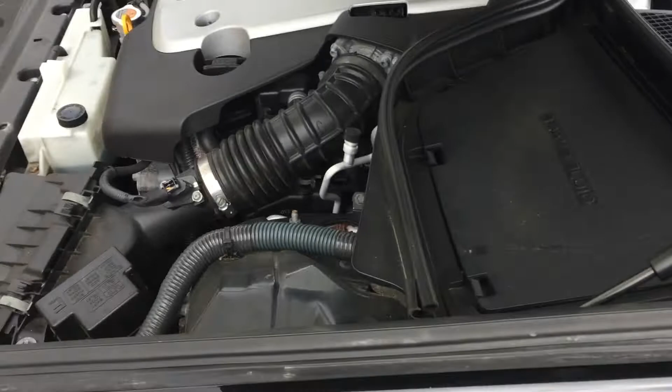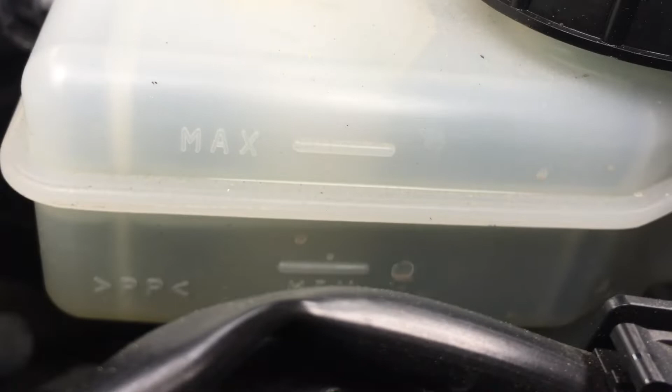So pop open the hood. It's already open actually, but right here on the driver's side, we have the brake fluid reservoir. Pop it open and check your brake fluid level. Let's see what we got here. If you can see that, I'm actually kind of low. Here's max, here's low. I am somewhere in between there.

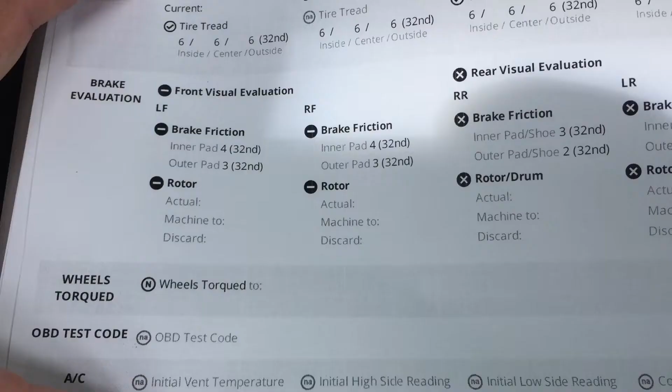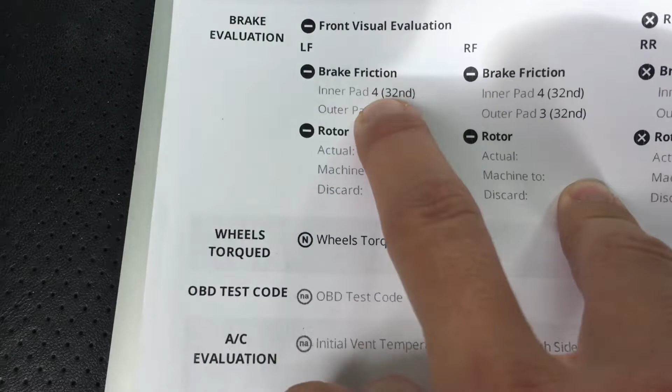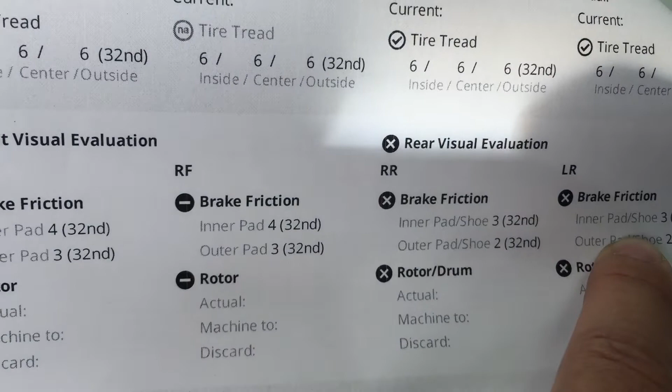Now here's a quick thing. Before you go and start dumping DOT 3 brake fluid into here, there's a reason your brake fluid reservoir is low. That is something worth checking out. In my case, I know what's causing it, so let me show you. So here we have a brake evaluation and vehicle inspection. Check it out. Front brakes, 4.3, 4.3, maybe okay. But here's the thing, check out the rear pads. 2/32nds, 2/32nds, 3/32nds, 3/32nds. The problem why my brake fluid level is low is because I need to replace my pads. My pads have been worn out.

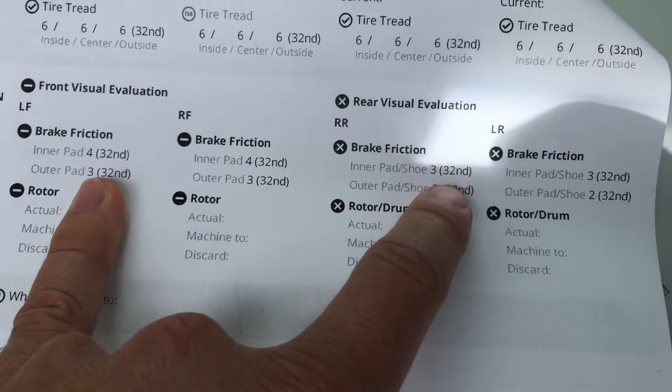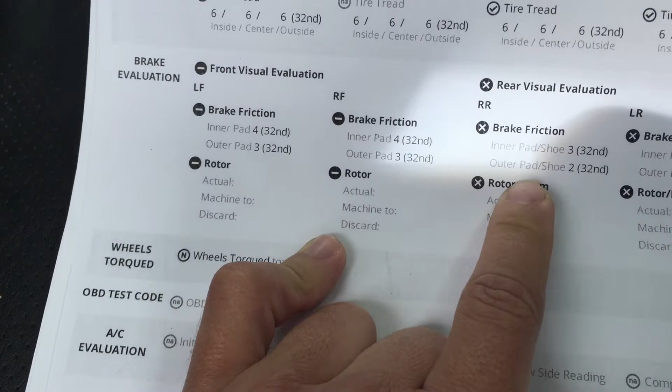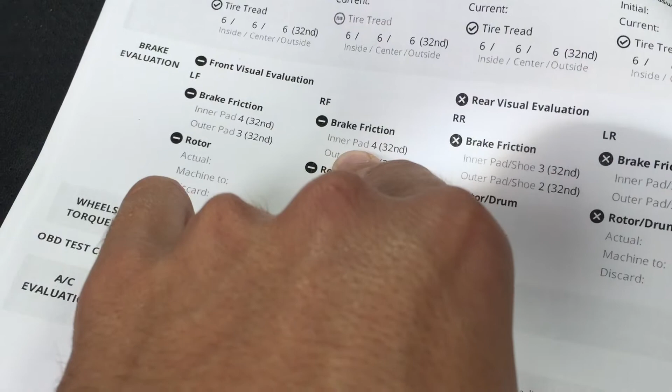So you can probably stop watching the video here because honestly, this is all the research I did. In most cases, if you're accelerating hard and your brake light comes on and then it comes off, the first thing is to check your brake fluid level. If it's a little low, maybe you need to replace your brake pads, or just add some brake fluid if you're really lazy. But for the rest of the video, I'm just going to go through and replace the brake pads all around, not only the fronts but also the rears. Rears are high priority, but we'll just do everything all at once.

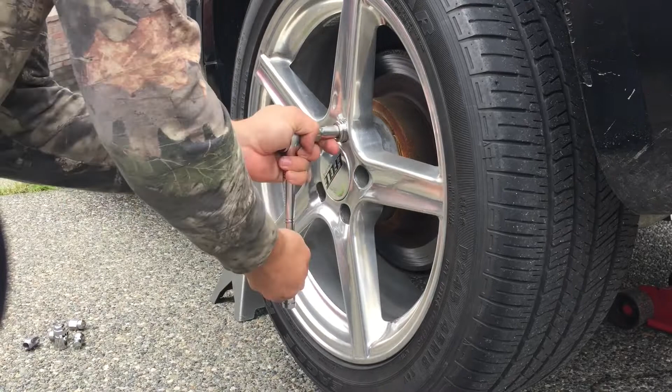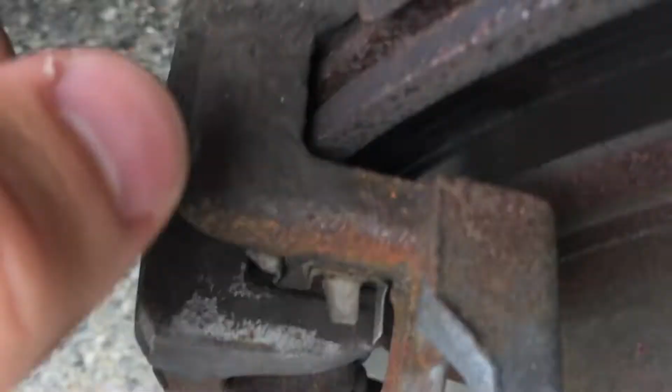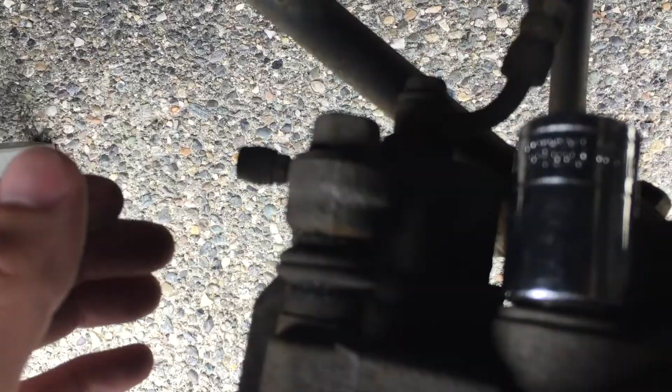So because I am taking off the rotor, I need to remove the caliper. To remove the caliper, we have one bolt right here, one bolt right here. Both of them are 19 mil bolts. I'm probably gonna have to do this off camera because it's very tight in here and there's not a lot of room. So once I get that done, I'll get back to you. For the lower bolt, a socket will not fit. There's no way to make the socket fit, so you have to use a wrench and then just hook it on right there. Okay, so I'm gonna get that off off camera and we'll continue.

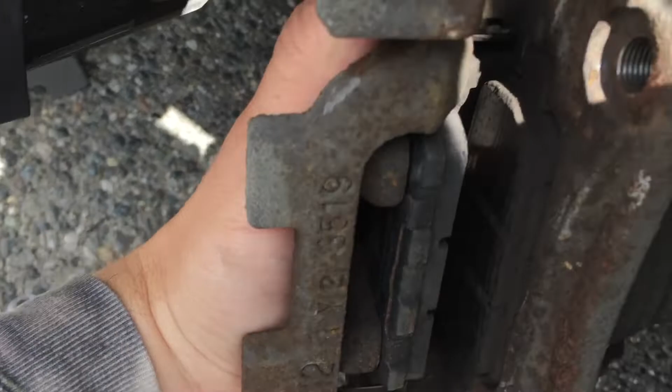Okay, so now that I got it removed, I should be able to just pull it off. Yeah. Okay, to be honest with you guys, these are not looking too bad. I mean, they've got life in them. These are not that bad, to be honest.

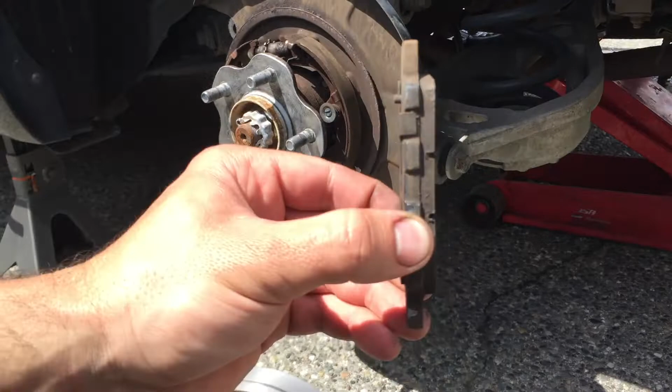Okay guys, so maybe you can hear the brake lathe running on the other side. But here's my findings. These pads right here, this is from the driver's side. If you look at them, they got a ton of beef left. Like, I mean, look at that. Still got the grooves. That's one of them. Here's the other one, right? Both of them got a ton of life left, like legitimately a ton of life left.

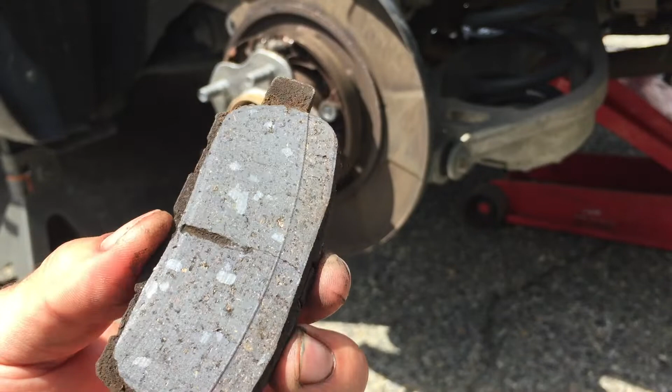Check out what I found on the passenger side. Boom. Now, somebody might say, hey, you know, the brakes are probably stuck on one side. Well, actually, I looked and the caliper's moving fine.

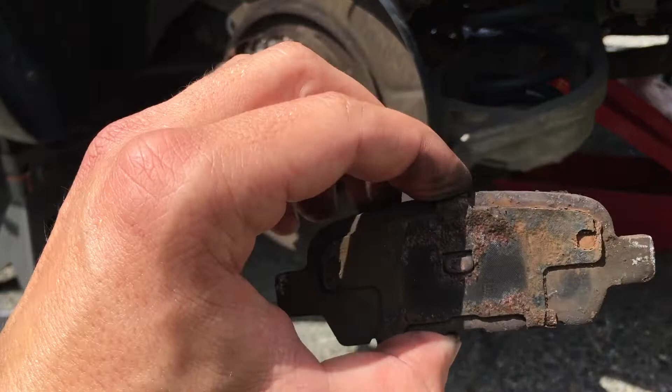But here's the thing. This is again from the passenger side. Look how old this thing looks. Here's the second one from the same side. Now look at the other side. You see a little difference? The ones on the driver's side are way newer. Passenger side is old, so it leads me to believe that somebody swapped one side and left the other side.

So we're gonna give it new pads. I redid the rotor, got it refinished. So we're gonna just try installing that and see if that helps.

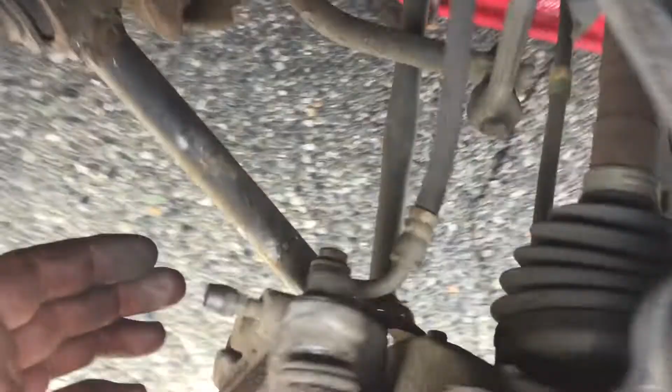So we got one side on. Basically what I had to do, this bolt for the caliper, you can't fit it in between this, I can't remember what the arm's called off the top of my head. So basically I loosened the bottom bolt right there for the whole assembly. I loosened it enough to pull this up. I pulled it up, I put in the bolt, and then I screwed it all down.

But now I have the other side to do. I'm gonna do that side off camera because it's pretty much the same thing as this, and then we'll get to the front of the car.

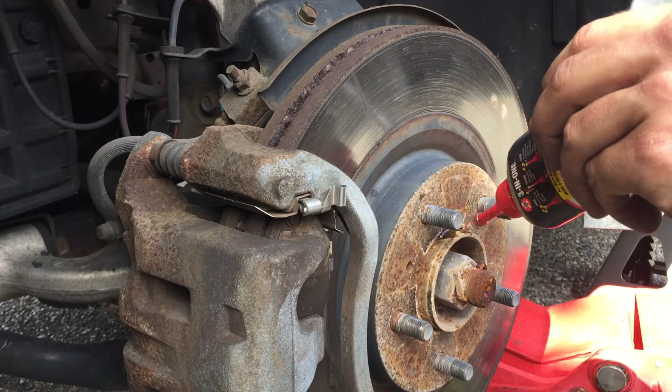Okay, so these brakes have not been taken off for forever, so we're going to put some penetrating fluid on them. Let that stuff work its magic. And using the 14, we're going to break the bolt here so we can get the caliper off. Okay, to get this guy off, we need to remove two 22mm bolts. There's one right here and one a little bit lower. If you look at these pads, this might have been the problem because these guys are dead.

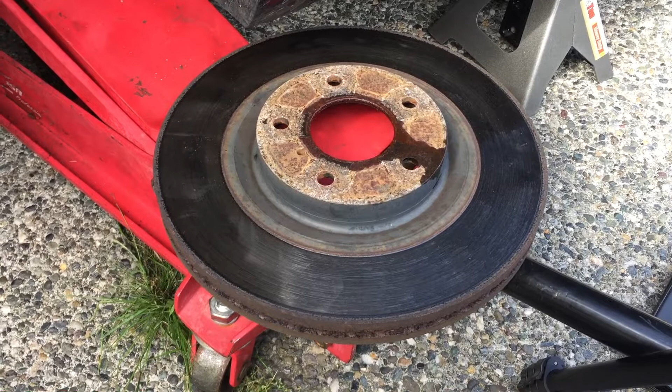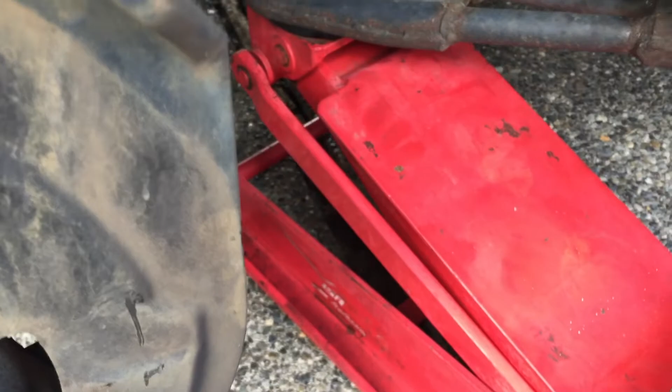Okay, we got the rotor off. I purposely skipped the part of how I took it off because it's literally sketchy, and I don't want you guys to learn something that's not the right way to take it off. If you see those, maybe you can figure out how I used all three of those to take it off.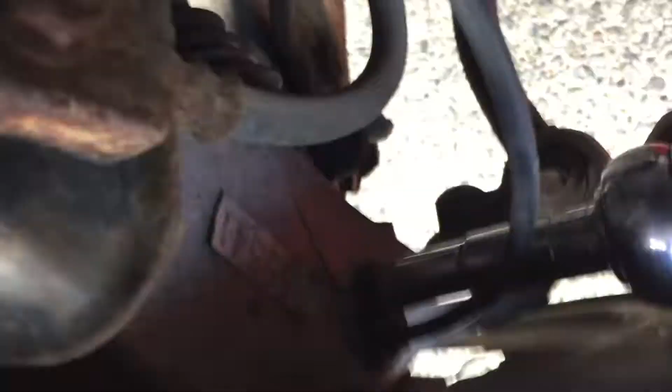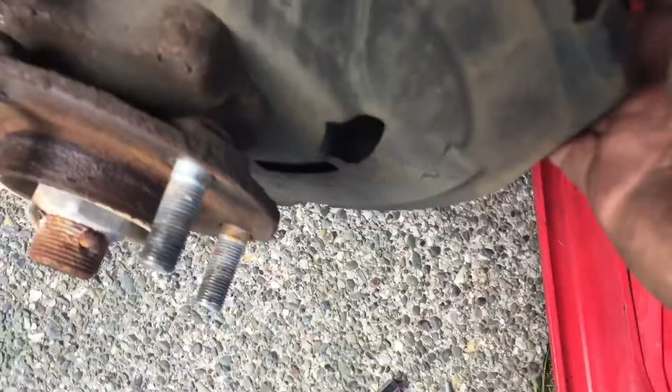But right back here, I'm gonna do a little preventative maintenance on the speed sensor right here. It's a 10mm bolt. Sorry, it's a really weird fit. Now we're going to just take it off real quick. And if you look, it's pretty dirty. So I'm going to just clean it off, blow some air into the hole right there, and then we'll put it back on.

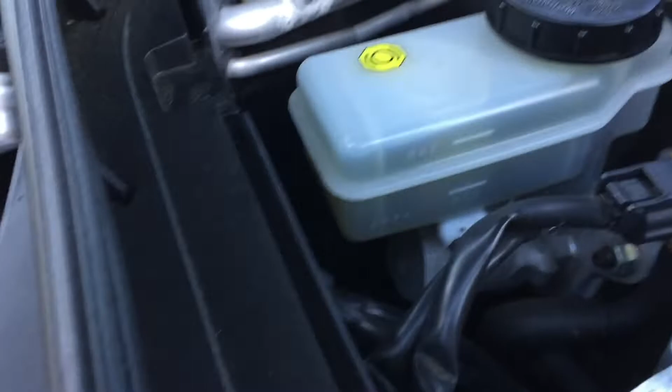So brakes are done, and here's another thing. Look at this. Remember how this was super low? You see where the fluid's at? It's pretty much at max now. So that's why you don't top it off. You change your brakes, and then you don't need to top it off. If you're lazy, you can top it off. If you want to do it right, change your brakes, and then you won't need to top it off. But let's check out the results.

Okay, so we are back in the car driving. Let's gun it and see what happens. This is after I did the brakes. Let's make sure there's no cops though. And check it out. Speed light doesn't come on. Brake light doesn't come on. I think we fixed her.

So hopefully this video helped somebody out there. If your brake light comes on when you accelerate, check your brake fluid level. And if your brake fluid level is low, check your brake pads. They might be due. Hope this helps.